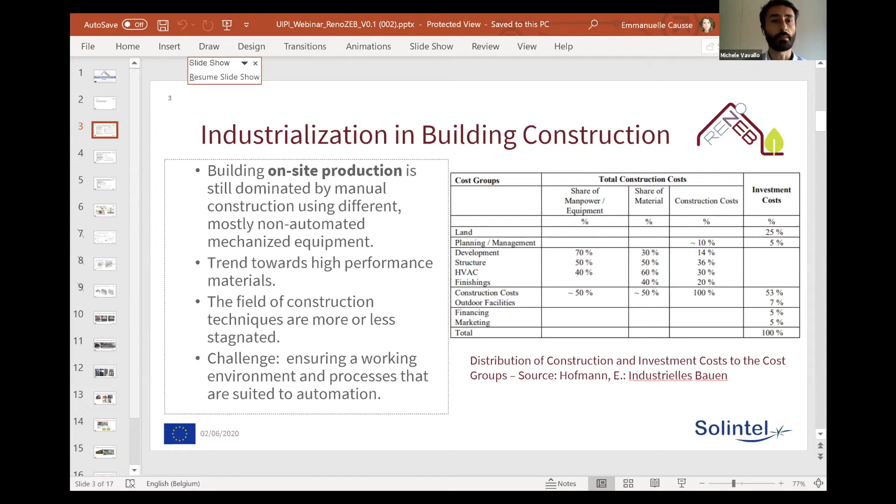What has been pushed in the sector is improving the cost, improving the material, improving the technique of construction. And I was talking about here.

The most important innovation was in the 80s, related to the prefabrication of modules that were manufactured outside the construction spot, then transported and installed. This could be a simple installation or a more complex one, because in the modules you can find pipelines, integrated elements, cables, and basic finishing.

In that case, you have a different kind of complexity. So we've seen innovation also in the systems for connecting these modules, in anchors and their joints. Still, we have to say that these big prefabrication elements were more likely created for very big buildings, not for small or average buildings. So this is also the negative part. Still, it was a big push into innovation.

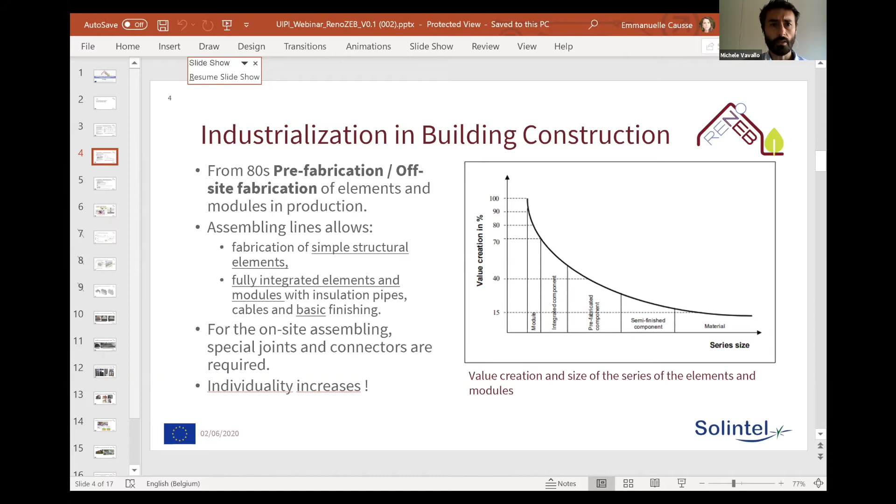This innovation improved the value creation of the building itself, and also its individuality, so the possibility to customize the building as well. So which is the status we have right now?

What we see these days is the willingness to bring other industrial sector experience inside the house sector, to improve whatever could be improved, I would say. So we are seeing technology transferred from other branches of industry.

I'm talking about, for example, transport technique, fabrication of elements and modules like the one we have seen, fitting the connection, positioning and fixing in the corresponding place. So the improvement of millimetrical installation.

I would say this is difficult in some buildings, and also in the philosophy behind it, because normally it was manual. Now this kind of installation is more mechanical or automatized, using special tools. As for information technology, we already know different software from the last decade that helps us in design, preparation, construction, and monitoring, all the steps of the overall process of building construction, also retrofitting.

We also have software related to 3D modeling of the building that helps us mainly in the design phase. For what concerns management, and concerning energy efficiency, in the last decade as well, we have building energy management systems, software that helps us also in the management and operation of the building, I would say.

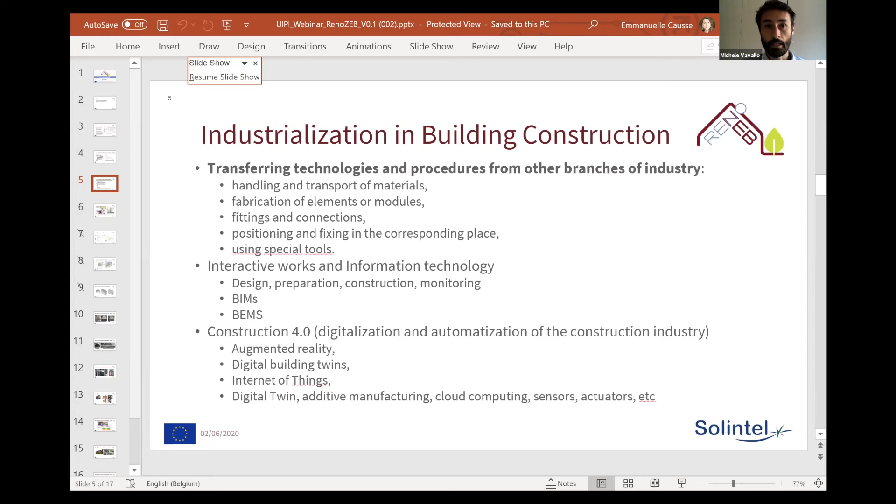Internet of Things, sensors, actuators, why not additive manufacturing? I think this is also a very important aspect, and cloud computing. So this is an example. Now, this is more or less the introduction of what we have: benefits, trends, and in line with it.

So let me introduce you to some examples coming from the RenoZEB project. Here we have the production of software and tools. We have a platform that helps and supports all the stakeholders in the decision making to create a building or to do a deep retrofitting of the building.

We have different tools for 3D modeling. We have tools that also operate in estimating the energy efficiency, but I'm not going to talk about that today. In this forum, I will just talk about the plug-and-play modular facade we are working on.

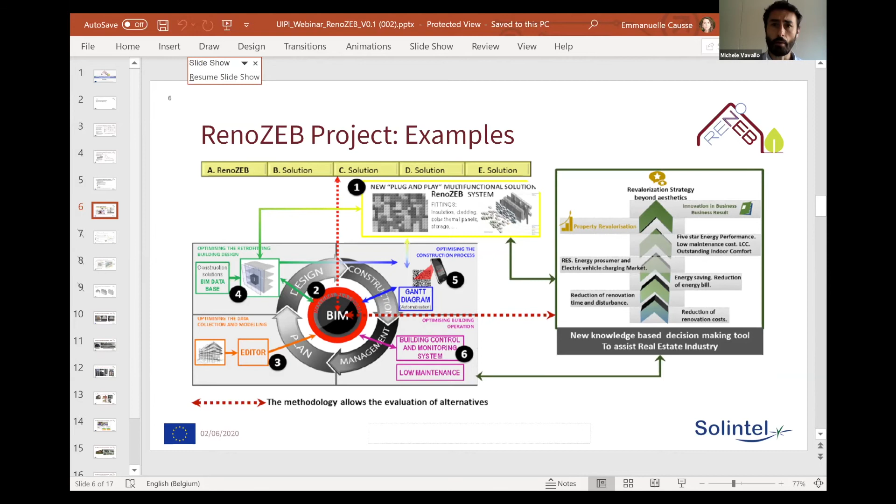Our objective is creating a standard, plug-and-play modular facade, easy to install, cheap, easy to transport, so to improve timing and costs. We have analyzed what could be the standard size that could be applied in all buildings across Europe.

So we have here some pictures about the opaque unit. You have the first two examples, the wood-like and also wood plastic composite, and also the ceramic outfit. You can change the outfit because it's very highly customizable. You can change color, ceramics, or whatsoever, depending on the project and also the owner of the building.

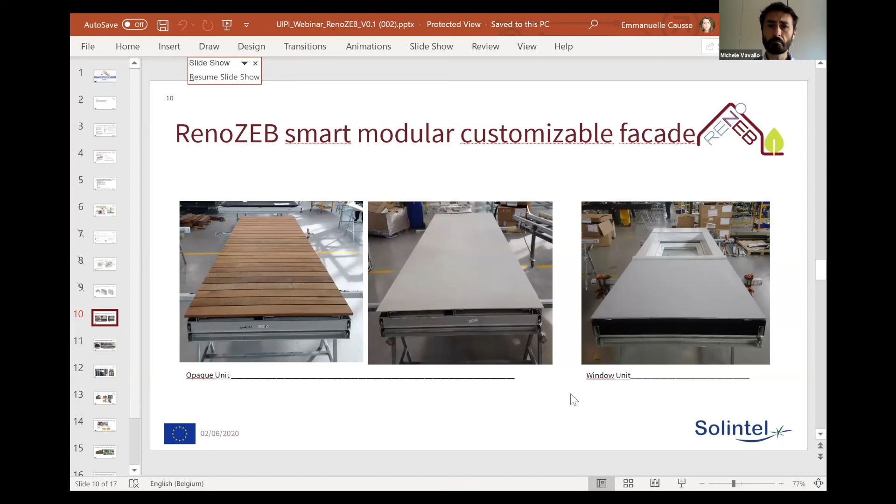You have the windows unit there. The window is also an innovative one because it's locked and it manages the in and out air flow, manages the humidity, and also the thermal recovery of the inlet flow as well. And we have here also the photovoltaic units part and the solar collector part.

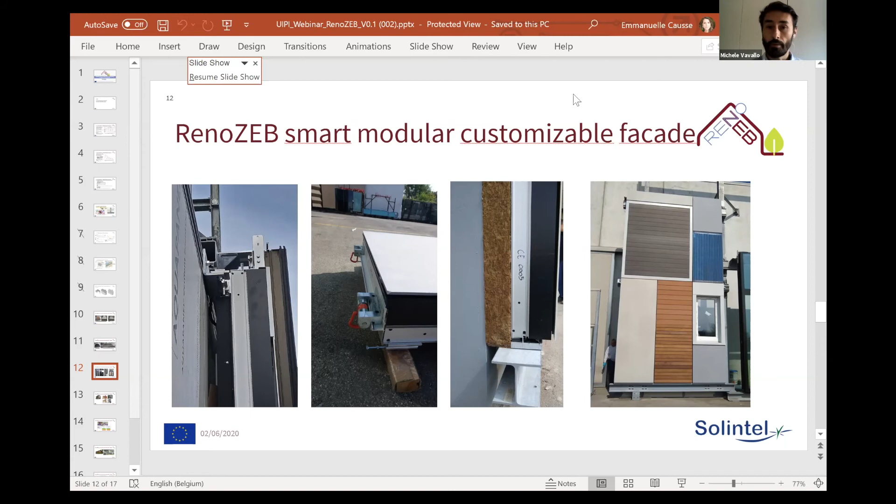In this picture, you can see the mock-up of this element on the right, and you see how to install it. The innovation we have brought in this project is also the joining system, very easy to install because you put it there, and after, you lock it very fast. So we have this kind of innovation introduced, and here's what we're going to do with that.

So we have two pilot buildings in this project, and we have one in the north of Spain. This is the building you see from the 1960s - it's not a private building, it's a public building. Using our software, you can see the rendering of how the building will be in the future, installing the RenoZEB solution.

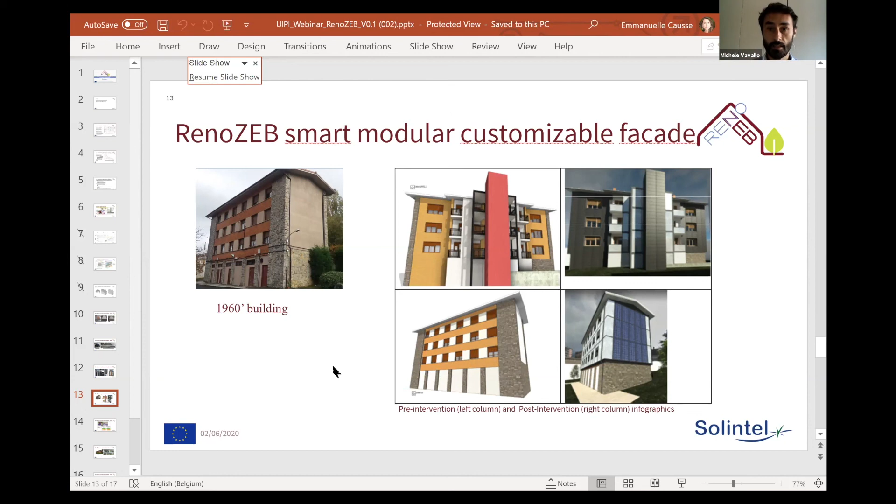We have a software that just works with our solution and helps stakeholders take decisions, because according to what you draw in the software, the system calculates the thermal improvement or the energy improvement you have, and also the cost. So it helps you take the decision. According to this software and our estimation, the building has an E-class category from the energy efficiency standpoint, and we will bring this building, in the retrofitting that will start in October this year, to B-class.

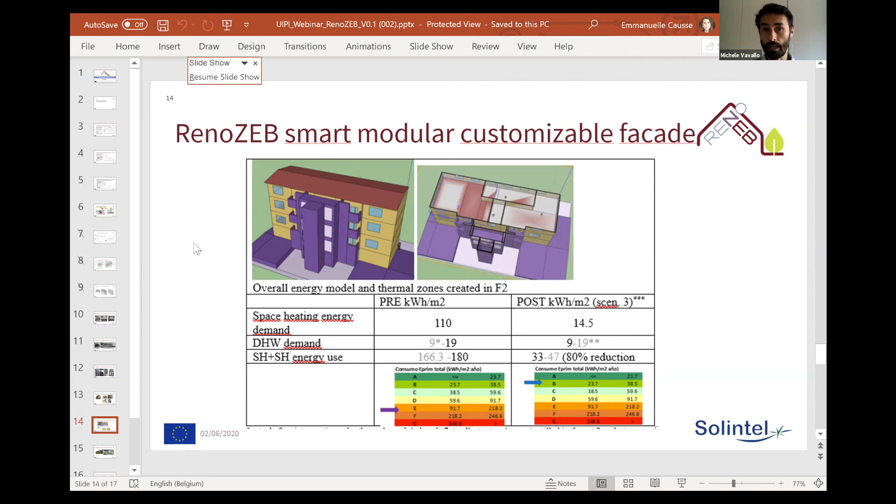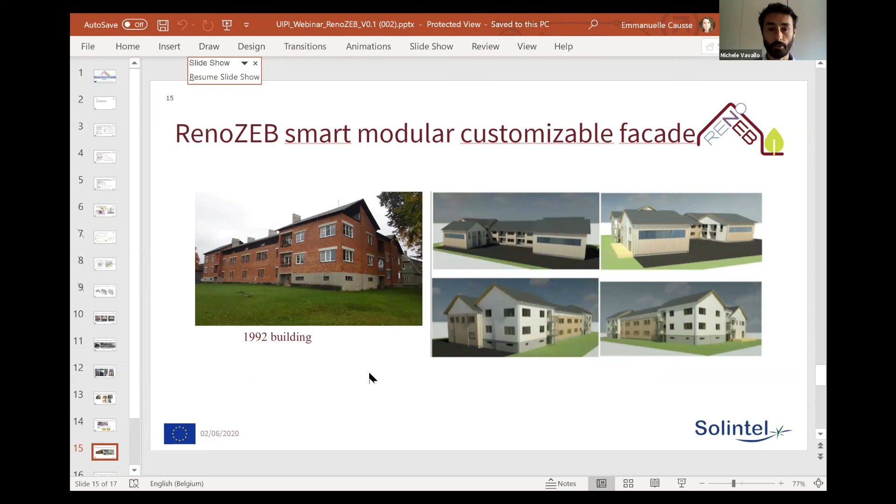The second building is a big private one in Estonia. It is a building from 1992. You can see here the real picture and the rendering on the right side. In this case as well, according to the estimation, we will bring this building from the E to the B category class.

So it will be demonstrated - this building is going to undergo the deep retrofitting. The work has already started in May. So this will be the first building we will experience, and we will know very fast, I think in about 6 months, the final outcome and how it works.

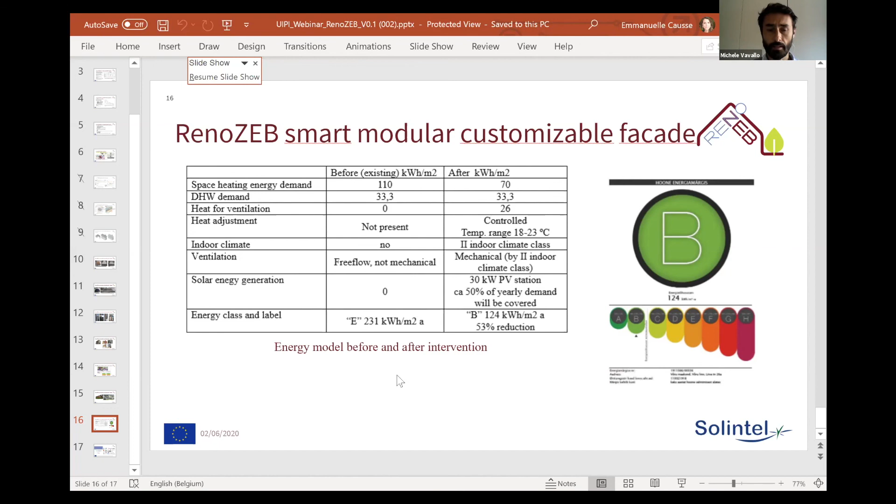So yeah, this is my intervention. Thank you very much. Again, I'm the coordinator of this project.